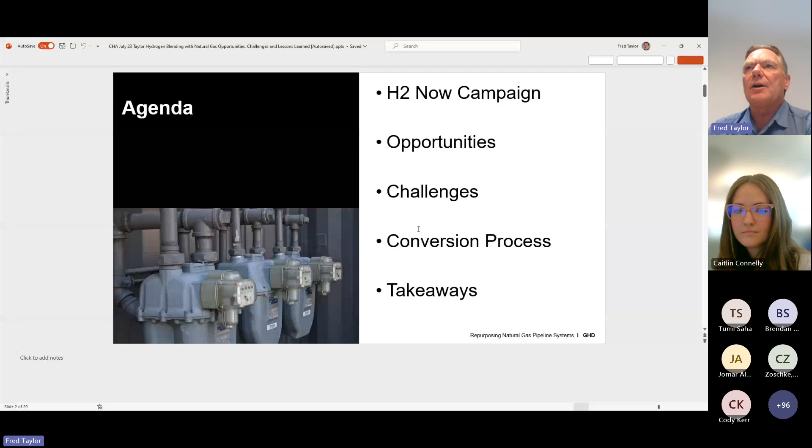So this is what I'm going to go through. Like I said, the campaign opportunities challenge, a little bit of the conversion process, and I'm going to leave you some takeaways around hydrogen blending. So the thought leadership piece we did called H2 Now was earlier this year. We focused on 3 areas: hydrogen market readiness, community and stakeholder readiness, and pipeline infrastructure readiness. And I'll go through each one briefly.

So hydrogen market readiness, we looked at all the different signals in the market that we're seeing. So there's many different things that are showing that the market is ready and it's growing and it's starting to adopt hydrogen blending globally across North America and Canada as well. So many things like technology advancements, adoption in different industries that are hard to abate, significant amounts of funding in different areas, and decarbonization incentives, research and development things. We're seeing decreasing hydrogen production costs, development of end user markets, and a lot of worker training programs.

So in summary, even though only 10% of the 600 large-scale hydrogen projects worldwide have reached final investment decision, a lot of projects are still going on, just a little bit slower and a little bit smaller scale, but there's a significant market getting ready to transform hydrogen blending across the globe.

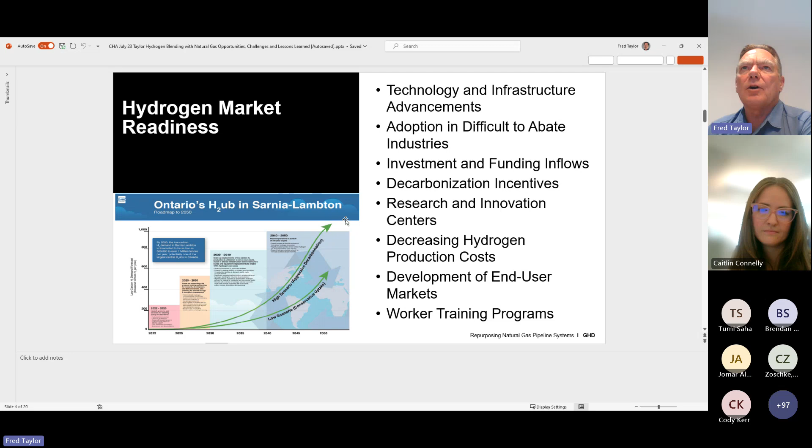There's a huge amount of information here, and we're keeping this up to date for multiple clients as we go, and it really helps us provide a good up-to-date view of what's happening in the market worldwide. And there's significant activities going on.

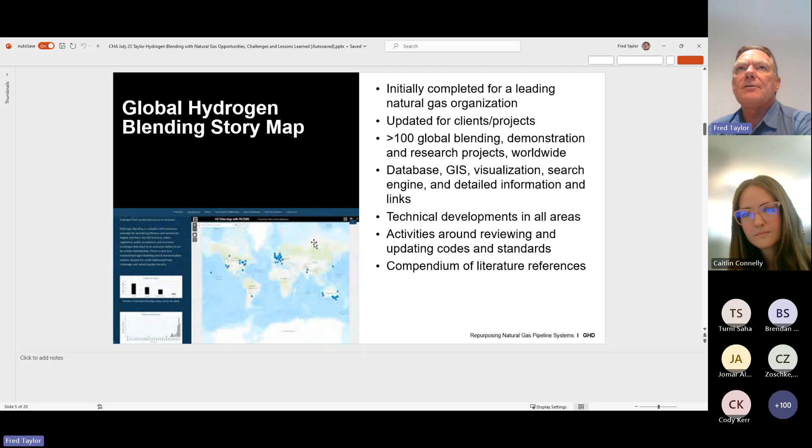Next up was community and stakeholder readiness. So the community stakeholders are so important when you're doing a hydrogen blending project. And the other category of stakeholders that is really important is the internal stakeholders. The utility, the energy company that's doing the project, is just as important to have on board as well. So when you first look at stakeholders, you need to map all the potential stakeholders that are going to be impacted or affected or want to be involved in your project.

You really need to engage them with good dialogue, introduction, and awareness around hydrogen, and then get a lot of feedback. So you're really managing those connections and helping bring them to your project to help you with your project. So a lot of people, internal, external, they say, why are you doing this? Who's going to pay for it? Is it going to be safe? Who else is doing it? The typical kinds of questions you get, and you need to be ready with a whole bunch of answers around that. And this engagement process is so important for hydrogen blending projects.

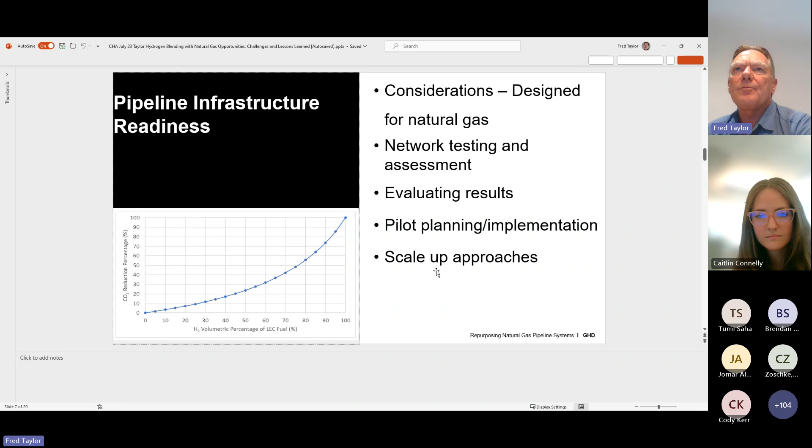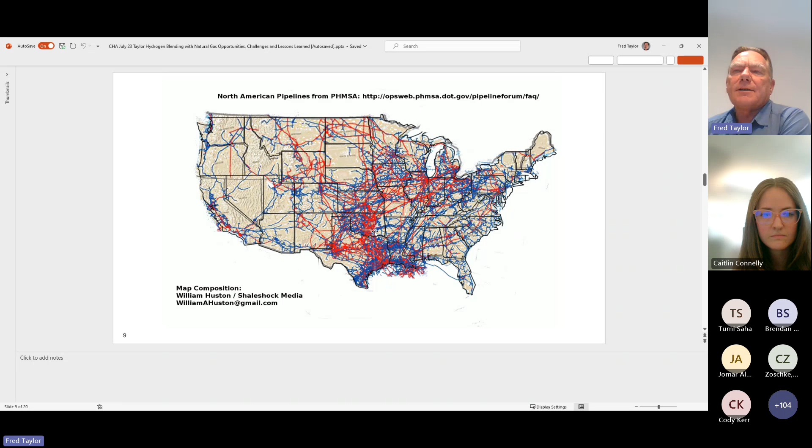So what are the opportunities around hydrogen blending? This is a map showing the natural gas networks, most of them in the United States, and Canada is very similar. And if you think about that network that we built over many decades, there's over 3 million miles of pipeline. 90% of it is lower pressure distribution, 10% higher pressure transmission. And it's so vast, one new customer is added to this network every minute in North America.

We've spent trillions of dollars on this infrastructure. We spend tens of billions of dollars on it every year, maintaining it and operating it. There's hundreds of gas utilities that manage this network. It's very highly regulated, and reliability and safety are absolutely critical for this network. And if you think about the numbers of natural gas in the US, it's about 32 trillion cubic feet per year. That's a huge amount of gas.

That's half of the volume of Lake Ontario, just a massive amount of gas. And it's used across everything, all sectors: business, industry, power plants, homes. So very widespread use. This is a very large infrastructure that we built.

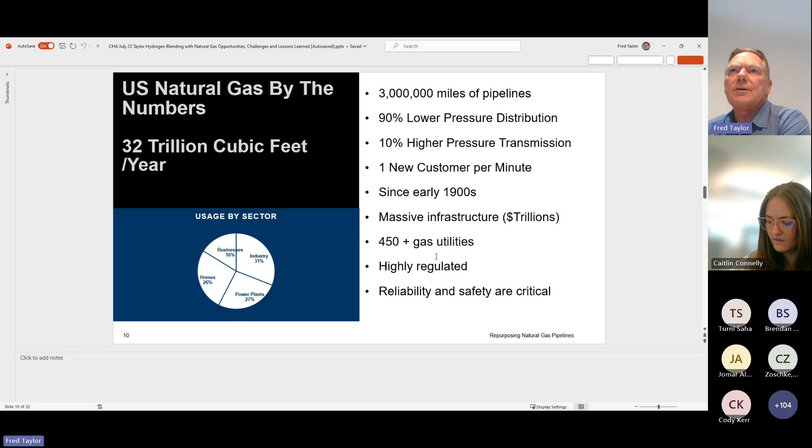So why are we looking at repurposing and blending? One of the fundamental reasons is if you use existing infrastructure, it's only 10 to 20% of the existing cost versus building a new pipeline, which is very difficult to do, as we're seeing out in society. It's much faster, there's a lot less environmental impact, and much more positive community engagement. And because you have all these thousands of users on the pipe network already, there's a lot of opportunities to help them decarbonize. And it really is a pathway to long-term transition.

There's many examples of pipelines that have been converted to blends or 100% hydrogen. One at Long Beach, a crude oil pipeline, actually, that's now 100% hydrogen through a residential area. Backbone pipelines in the Netherlands and Germany. And there's a lot of activity in Australia where we're doing much work around converting pipelines.

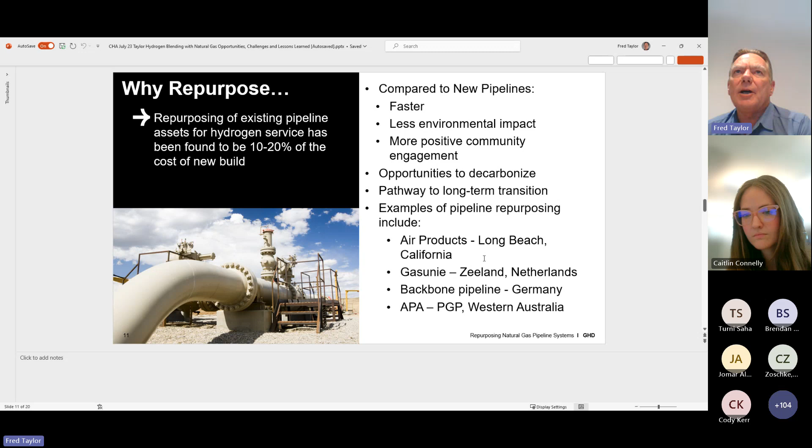So what are some of the challenges? Hydrogen is just different than natural gas. It's more flammable, it's more potentially explosive, it's got a different heating value. So that provides really significant challenges around blending it into natural gas and then using it at 100%. Integrity is always something people hear about when there's metal steel pipelines. The hydrogen molecule is so small, it gets right into the structure and it can cause embrittlement and cracking and that type of thing. So there's a real integrity issue that needs to be addressed.

Safety, obviously, because it's a different kind of gas. Metering gas quality is different with blends than it is with natural gas. And then compression is very different for hydrogen. You need a lot more energy to compress hydrogen than natural gas. And you need to manage the network, including things like large underground storage caverns that are part of lots of networks. And then end users, there's thousands of different end users. They all have different equipment, different appliances, different applications. You need to look at some of that equipment because a lot of it can accept a blend, some can't, and some the OEMs are working to make it so it can accept hydrogen.

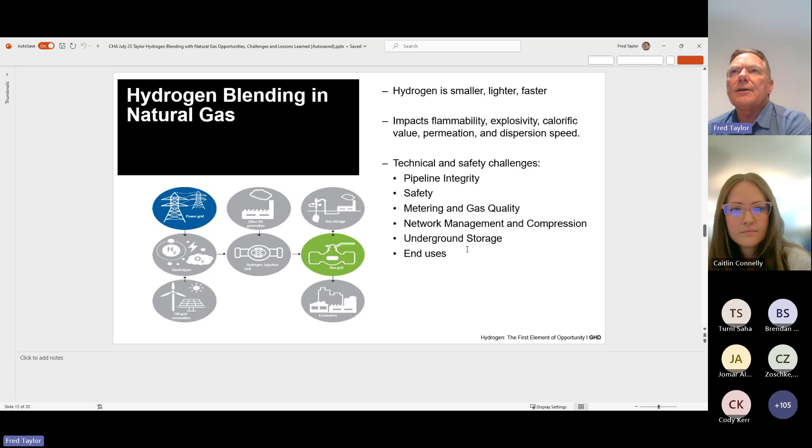So broadly speaking, gas transmission versus distribution. Gas transmission, these are the large interprovincial, interstate, intercountry diameter steel pipelines that provide a lot of gas long distances. They're a higher risk because of the higher pressures and the steel piping. So that diffusion and embrittlement issue becomes much more enhanced potentially with gas transmission lines, and it needs to be addressed.

And if you think of our networks that we built over many decades, the steel types have changed, the different ages of networks in different places, the workmanship has changed around welding and installation. There's a lot different when you introduce hydrogen: the velocity changes, the compression changes, all these different things need to be considered when you're looking at blending into a gas transmission line.

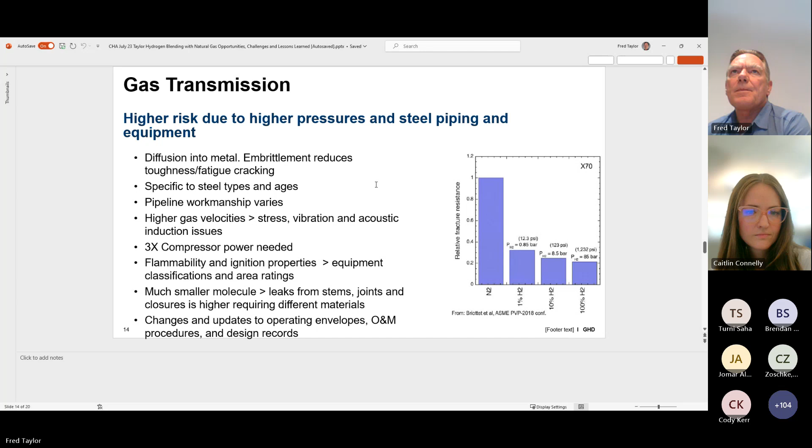On the other hand, gas distribution lines, a lot of them are plastic. They're newer, they're a lot less likely to be impacted by embrittlement with hydrogen, so there's a lower risk. And they also operate at lower pressures, which makes it a little bit easier. So similar kinds of issues need to be addressed, though, with all the equipment around the valves, the heaters, the meters, all the things that go with the network. Because if you blend hydrogen, the hydraulics change and the safety potentially changes as well. And you need different instrumentation to be able to monitor and measure the blends properly.

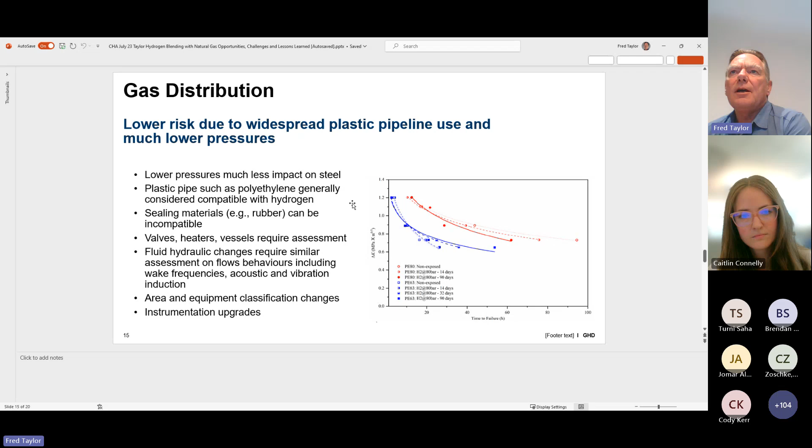So the conversion process, just very generally, there's a very structured process of engineering assessment that you really need to go through. The first step is to look in very good detail at the particular part of the network that you're looking at converting to a blend or 100% hydrogen. All the information on the materials, the construction, how it's operated, how it's inspected and maintained. You really need to evaluate that versus the large body of information that's been developed globally in terms of what you can and can't do with blending and pipeline systems.

Based on that, you have a good general sense of what you can do or not do in terms of blending. And then a lot of times what you'll do is some actual laboratory testing in the hydrogen environment to verify some of your desktop assessment work that you've done.

And then based on that, you'll look at all the other aspects of operating the pipeline and come up with a conversion plan, including where the hydrogen comes from, how much you're going to blend, how you're going to scale it up, how to deal with the end users and the community and the regulators, et cetera. And then you have an implementation plan. So in very broad brush, that's the process that you follow, and it's been followed on many projects globally, and it's being followed on projects in North America as well.

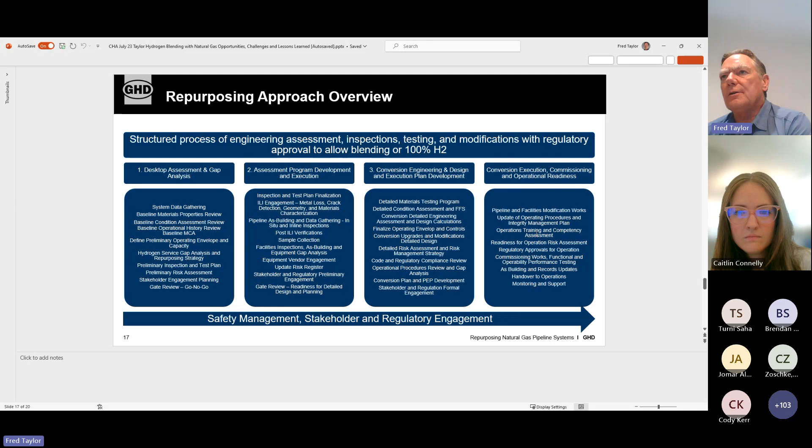This process takes up to 3 to 5 years to do, depending on the size and scale of project you're doing, how much of a network you're trying to convert, whether there's sensitive users or end users and that type of stuff, the regulatory environment, et cetera.

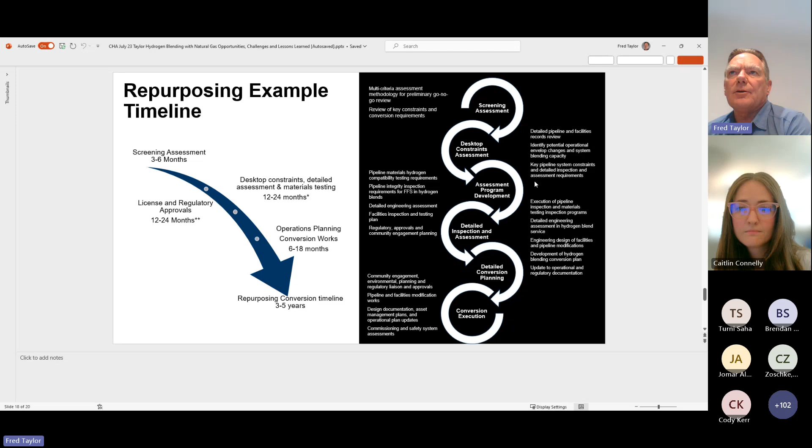And finally, just some takeaways. So really, I want to just say that this widespread existing natural gas network that we have is very amenable to hydrogen blending. And we should be using that network as part of our energy transition. It's already built. It's a lot easier to use infrastructure we have than to try and build new infrastructure and spend more money, have more environmental impacts and more concerns about building new infrastructure.

Because of all the uses of natural gas, the thousands that are in place already, there's very good opportunities to decarbonize, especially in hard to decarbonize industries that don't have other technologies readily available, like cement plants and steel plants and power plants. But that being said, there's absolutely technical challenges, like I talked about, economic challenges until the hydrogen economy gets to scale, regulatory challenges. It takes time to change codes and standards and regulations. You want to be safe and reliable when you change networks to hydrogen blending.

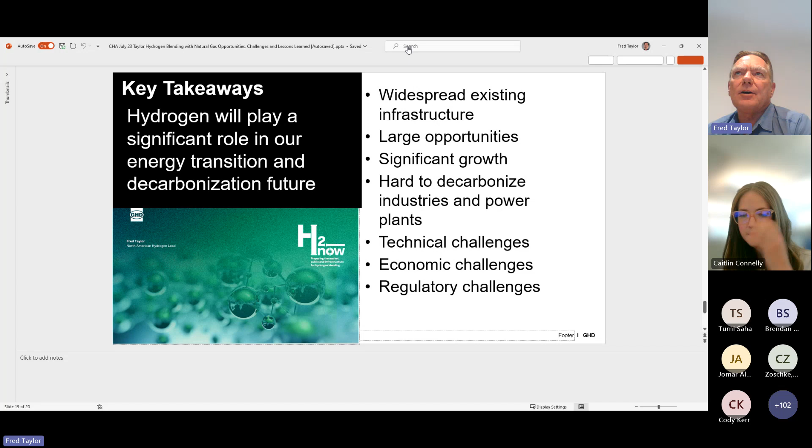And the process that you follow, you really want to deal with these challenges head on and be comfortable and conservative that you have a good plan for addressing all the issues and manage them going forward when you do a project. So with that, I'm going to hand it over to TC Energy and ATCO, two of our great clients, to talk about their project.

Thank you. Caitlin, feel free to share your screen. And everyone just hold on. Okay. So I hope my slide is showing. Yep. Perfect. Thank you.

So my name is Caitlin Connolly. I am a project engineer with TC Energy, and joining me for this presentation is Cole Zoschke. He's with ATCO and the hydrogen team over there. We are going to be presenting on our work with GHD that we've been doing, the feasibility for changing of service fluid from natural gas in an existing transmission pipeline to pure hydrogen or a hydrogen blend.

I want to take a moment and just showcase our companies we've been working with on the side here. So we've been working with GHD. They've been our engineering consultant for the project. We've also been working with Delphi. They've been helping out with the environmental benefits quantifications. CFER Technologies has been doing our material testing. And we do want to give a big shout out to Alberta Innovates. They've actually funded 50% of this project. So with that, I'm going to hand it over to Cole.

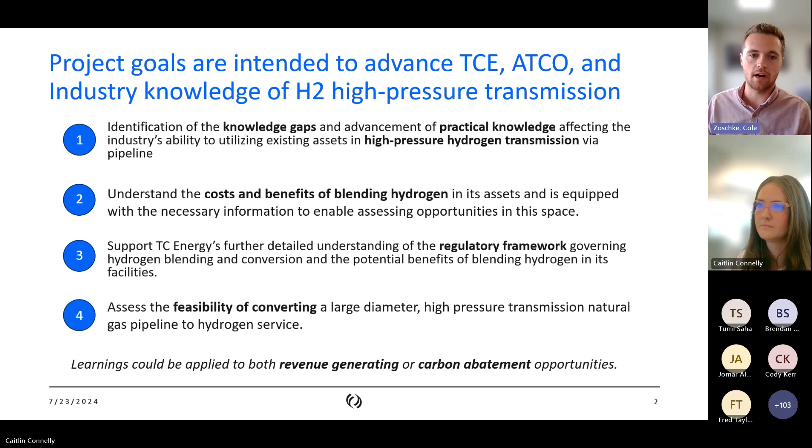And for the scope of work, an Alberta transmission pipeline was ultimately selected as the study location for assessing this hydrogen conversion. This pipeline consists of 131 kilometers of 20-inch line operating at a MOP of 9930 kPa. It was constructed recently, back in 2019, and it actually connects a producer to two natural gas fired power plants. The pipeline consists of 120 kilometers of main line, a meter station, 11 kilometers of lateral pipeline, 3 valve sites, and 2 riser sites.

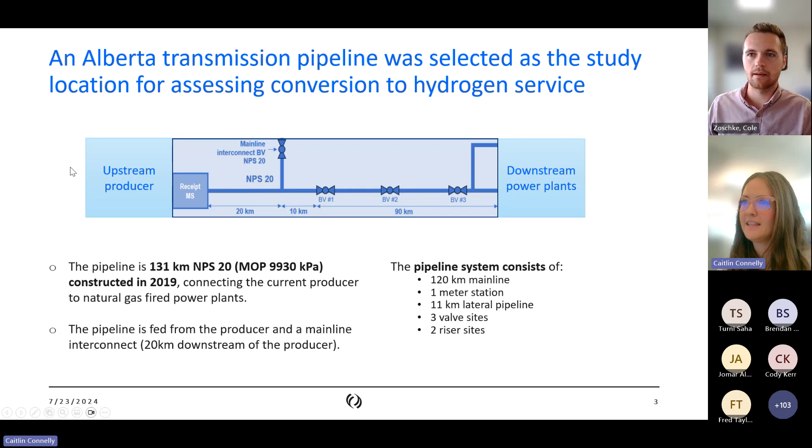Perfect. Thanks, Cole.

So for this project, we've been using CSA Z662 Clause 17 as our basis. Back in the 2023 revision, Clause 17 was introduced, and what it says is it requires an engineering assessment to confirm the max allowable hydrogen content and the maximum operating pressure of the system when we introduce hydrogen in there. So this is kind of what we've been basing the whole project off of. All the criteria for that engineering assessment can be found in Clause 17, and that's what we've been figuring out how to address through the project.

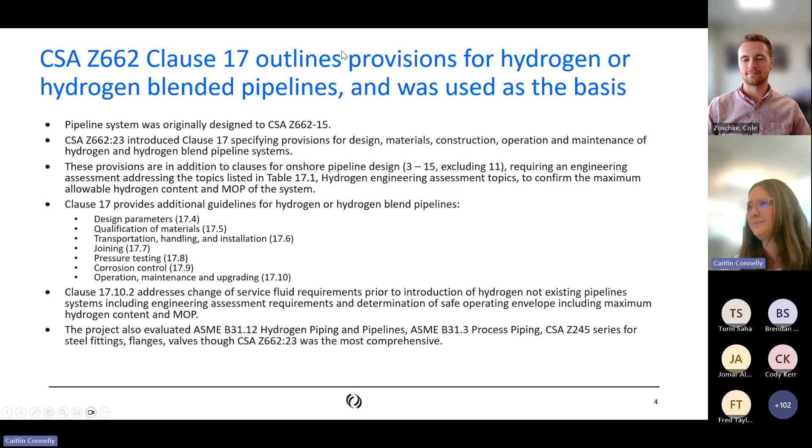Our methodology for the project was kind of just building off of what Fred was talking about earlier. We're stopping at the feasibility assessment though, and this is very much about asset readiness versus operational readiness. A lot of our operational procedures are being looked into through other initiatives. So for this project, we're doing phase 1 and phase 2 for the asset readiness.

Phase 1 was all about scoping and setting boundaries, understanding what we don't know. The last deliverable from phase 1 was a very comprehensive design basis memorandum. And that feeds into phase 2, which we're currently in on the project. Very much getting into the details, doing the material testing. We'll be doing a process hazard analysis workshop, and having the engineering assessment as the final deliverable of this phase.

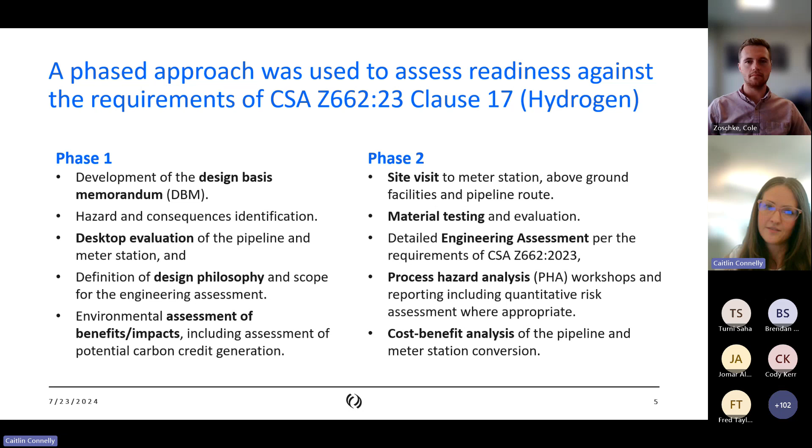From a screening assessment, we identified that this pipeline system is likely suitable for introducing hydrogen. MOP restrictions may be required. If you look at bullet point 4 here, the overall outcome was an amber assessment on a traffic light system. So it wasn't a clear go-ahead to just start introducing hydrogen, and it also wasn't any fatal flaws. This amber pretty much told us that we would have to do some further material testing and more desktop analysis before we can give a more definitive answer.

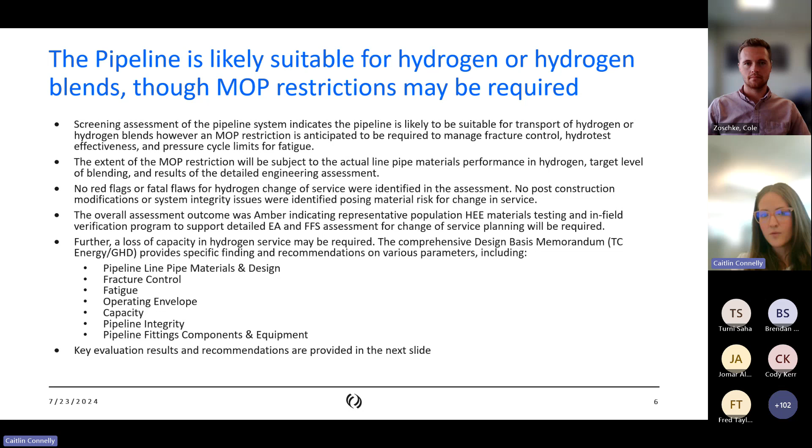And then if I just go to the next slide, the operating envelope and capacity were also assessed, because introducing hydrogen as a different fluid than natural gas had hydraulic implications. When we talk about operating envelope, it's really talking about the operating limits at a hydrogen volume that a pipeline can operate at while meeting acceptable safety and risk criteria. So it was parameters such as pressure, temperature, hydrogen volume and concentrations, velocities, etc.

So we did run it through the screening assessment, and we did a preliminary capacity assessment from there through our system design team. For equation of state, they used the Redlich-Kwong equation of state for this initial assessment. You'll see bullet point 3 there. It talks about an energy basis reduction of about 15% if we're putting through pure hydrogen, and that was verified through this assessment.

But for phase two, we'll be going into that a bit more. We'll be refining the MOP calculations, because we used quite conservative calculations for phase one, and those feed right into the capacity assessment, so that will be refined as well. Bullet point 4 talks about change in gas velocity, so that's something that will be looked at a bit more in phase two as well.

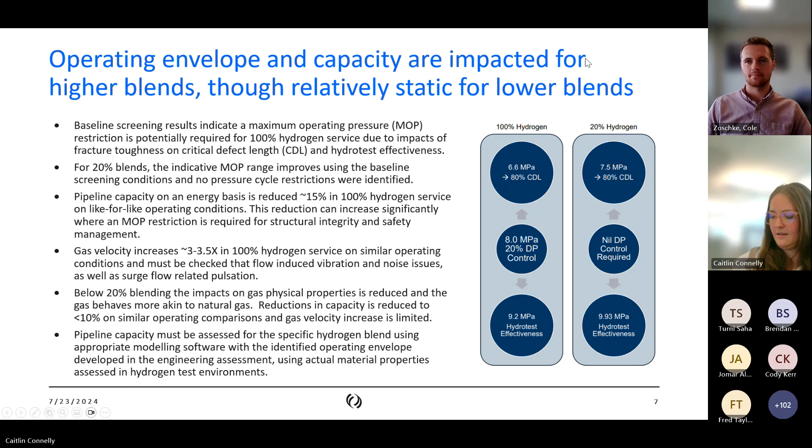And we did do some low percentage blending implications on the hydraulics, and it really wasn't that much. But the MOP definitely was reduced with 100% hydrogen, so we'll be looking at that one a bit more. And then on to Cole again.

A big part of this project was the material testing in the hydrogen environment to identify the long-term impacts that hydrogen exposure has on the pipe. So instead of focusing on the immediate hydrogen exposure, which is better understood in the industry, this project focused on long-term hydrogen exposure testing. Testing is being completed in 100% hydrogen environments as well as in air environments to compare how hydrogen actually impacts the pipe.

The key tests include tensile testing, fracture toughness, and fatigue testing. We're actually utilizing material left over from the pipe for this material testing, and for the project we're just using one specimen of wall thickness. Again, this is a feasibility assessment, and we obviously aren't going to be proceeding with injecting hydrogen very soon.

However, it's identified that in trying to move forward, we'll have to do further testing on the different wall thicknesses of the pipe. And this is what CFER is taking care of for us.

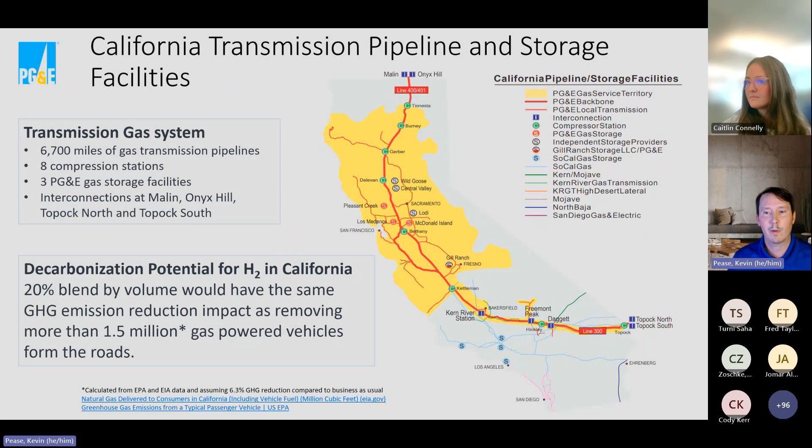It'll consist of a 1 to 2 mile transmission test loop with new and vintage assets representative of those found in the natural gas transmission system. Hydrogen blend levels are planned at 5%, followed by stepwise increase to 10, 15, and 20%, and potentially beyond that in the future. Operating pressure will be 720 psi, or about 5 megapascal for those metrically minded folks. This aligns with the ANSI 300 standard, and we intend to operate the facility for at least 10 years.

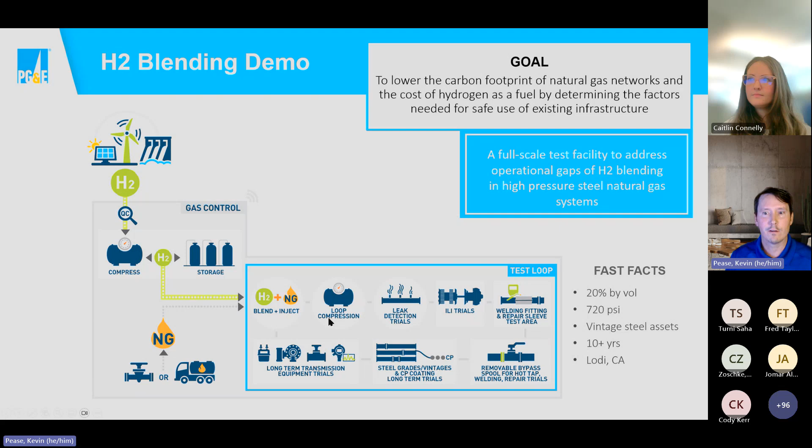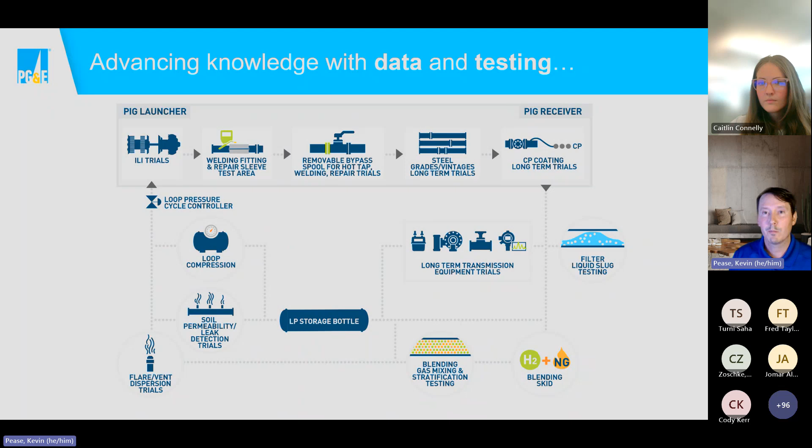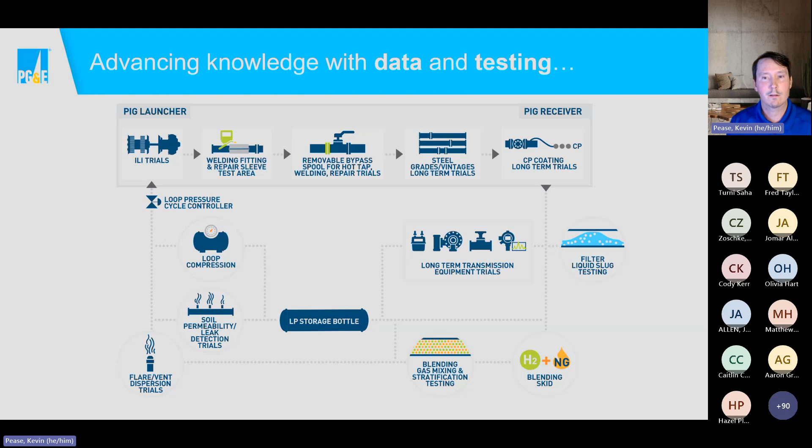The preliminary test loop design will have multiple areas for long-term testing of pipeline materials, transmission equipment, and hydraulic performance testing. I apologize. Eight proposed test areas are shown on the slide, which include inline inspection tool trials, welded high-strength fittings, repair sleeves, live welding and repair testing area, pipe and pipe coating testing, transmission equipment long-term trials, compression testing, blending and odorant injection trials, as well as a leak detection testing area.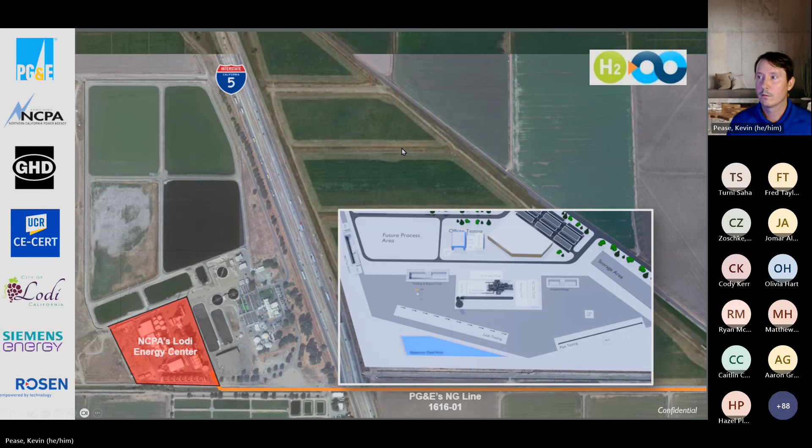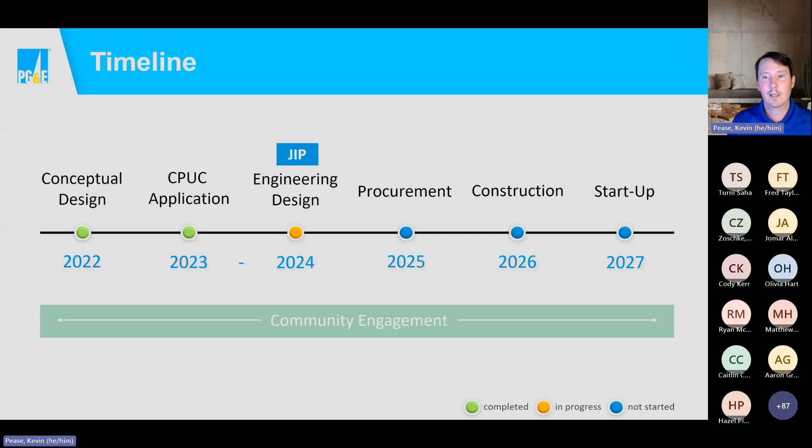In parallel, we're working to launch our joint industry project to run over a 1 to 2 year period that would move the engineering design of the project forward. Following completion of the engineering design, we'll move to procurement, construction, and startup hopefully by 2027.

Now I'm going to take a few minutes to talk about the joint industry project for this project. We're inviting interested parties, whether you're a gas utility, technology provider, or OEM, to join us in the joint industry project. The intent is for the facility to be representative of most legacy steel infrastructure in North America and function as a test bed for the industry. Electric Power Research Institute, also known as EPRI, will administer the JIP and provide strategic technical support for the design of the test loop and test plan vision.

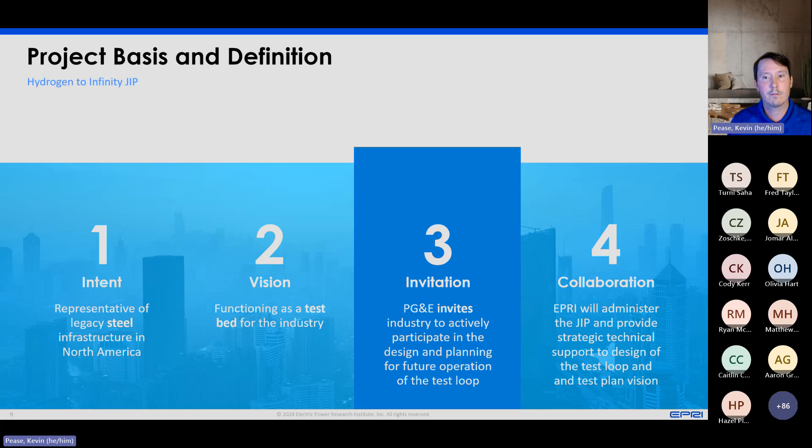The joint industry project will include the FEED and detailed engineering studies for Hydrogen to Infinity's transmission test loop. These pre-operational stages of the demonstration are critical to ensure the comprehensive design of the facility is completed, and we don't want to miss anything before it becomes operational. Once the facility goes live, this will evolve into a new JIP to oversee long-term full-scale testing.

The three main objectives are understanding the long-term effects of blending hydrogen with natural gas in a test facility that represents much of the existing natural gas transmission pipeline infrastructure of the JIP funders. Second is to identify the conditions or mitigation measures, if any, that would ensure a 20% hydrogen blend will not pose added risk to the common carrier pipeline system. And third is to increase understanding of the operational limits of existing natural gas transmission pipeline infrastructure when injecting hydrogen blends at 20% or possibly beyond.

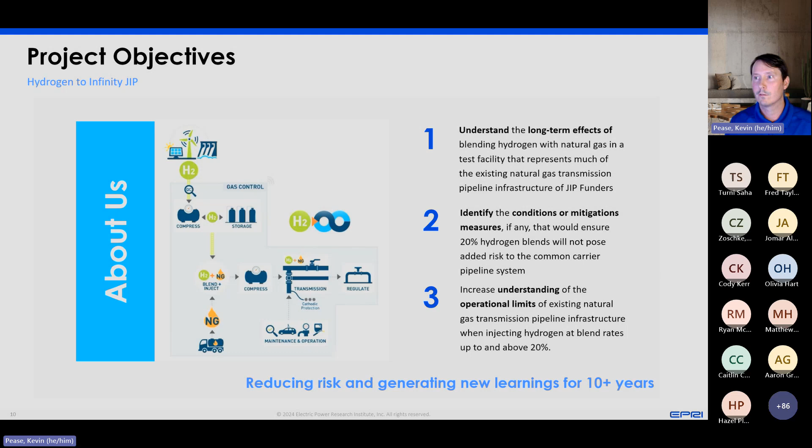So on the left side of this slide, it would be great to have your participation in the JIP. Your natural gas infrastructure would be representative in the demonstration's full-scale testing through the engineering design contribution of your pipe and pipeline components. These need to be set aside before the demonstration goes live, accounted for in the engineering design of the test loop, and installed during the construction phase. Your guidance ensures all the right full-scale tests are designed for. We don't want to find out we've missed a critical test after it's been operational.

If you're interested in building a similar facility in your area, you'll have access to the blueprints to do so. And so you'll have name recognition as a leader in this big final step to really move hydrogen blending forward in North America.

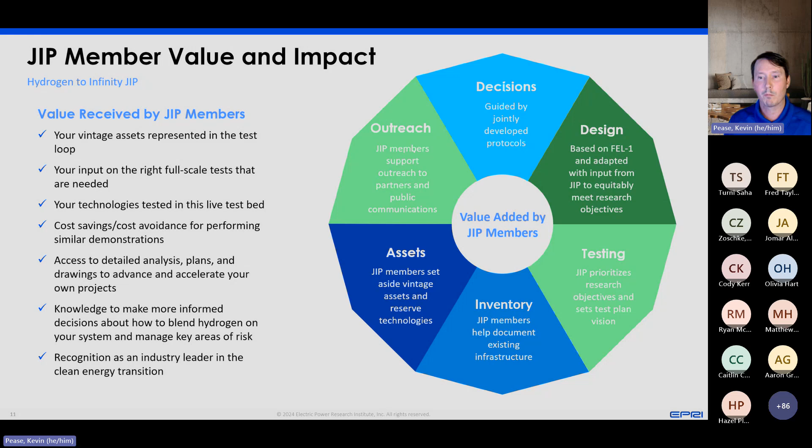On the right side of the slide are the responsibilities of members for the Joint Industry Project. These include active engagement through feedback on the test loop plans and design, and research objectives. We're using the design from the FEL1 study, as well as hydrogen blending requirements from the California Public Utilities Commission decision ordering this blending demonstration. Documenting and setting aside your vintage assets and technologies for inclusion in the test loop. And finally, a financial contribution to support the engineering design. We're looking for $160,000 per member over a 1 to 2 year period.

And finally, here are anticipated tasks and deliverables for the project: identification of key decision points in the test loop design, a test plan vision that will accompany comprehensive engineering design of the test loop, inventory of vintage assets for inclusion in the test loop, and solicitation for phase 2 of the JIP, pending external funding for procurement and construction of the project.

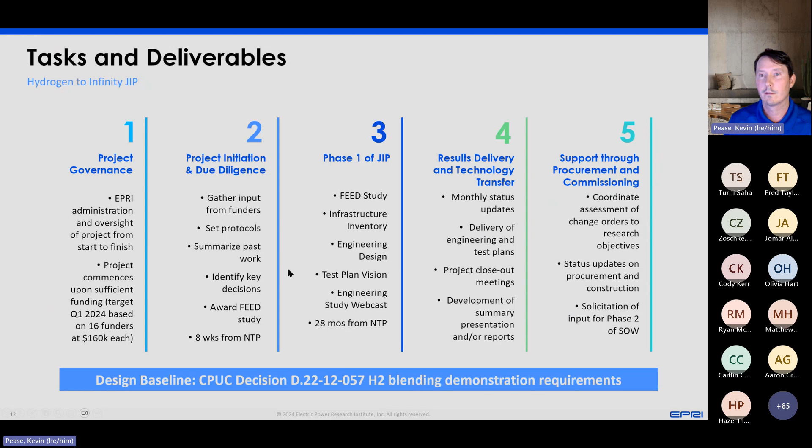And a little bit more about EPRI, the third-party administrator. If you're not familiar with them, they lead the Low Carbon Resource Initiative along with GTI Energy. It looks at fundamental advances in a variety of low carbon electric generation technologies and low carbon chemical energy carriers, such as clean hydrogen, bioenergy, and renewable natural gas. EPRI will provide strategic technical support for the design of the test loop and test plan vision.

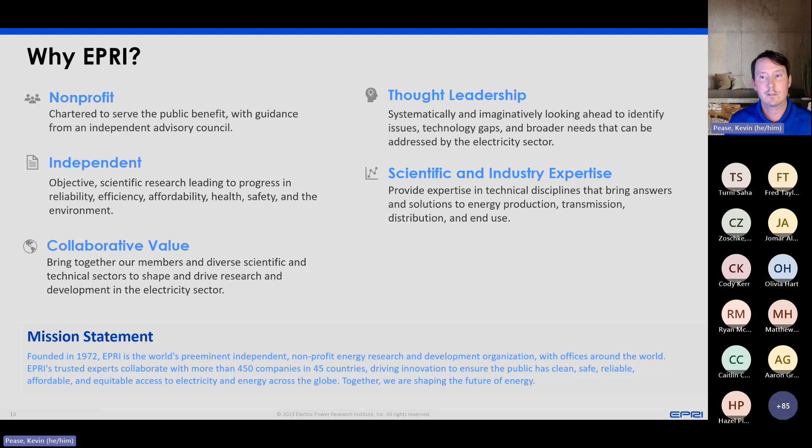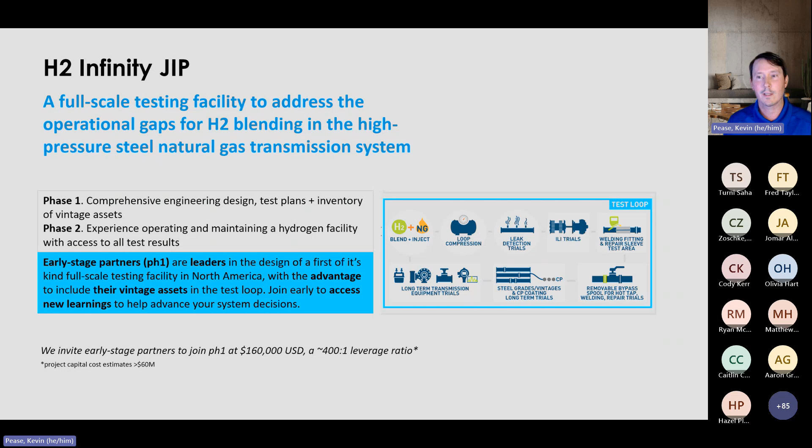And finally, last slide, it's a summary of the JIP and the full value of phases 1 and 2, and the importance of being an early stage partner with us in phase 1. Early stage partners are leaders in the design of a first of its kind full-scale testing facility in North America. The advantage of being able to include your vintage assets in the test loop. You'll also have access to new learnings now to use in your strategic hydrogen blending decisions on your system. And lastly, the financial contribution of $160,000 is very low when compared to the total capital cost to stand up the facility. It's around a 400-to-1 leverage ratio.

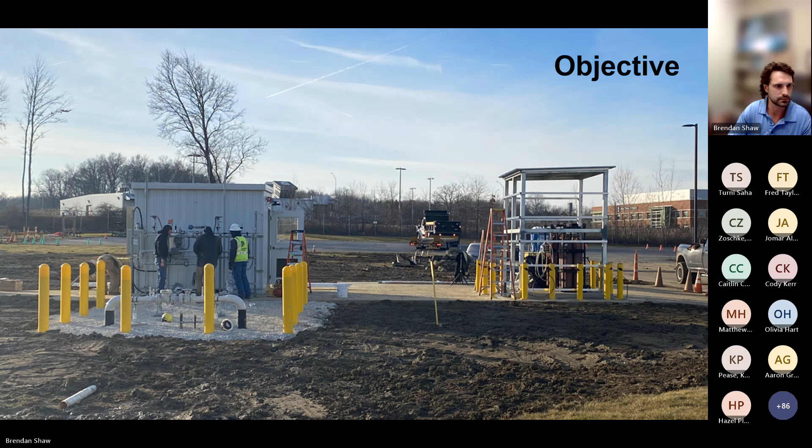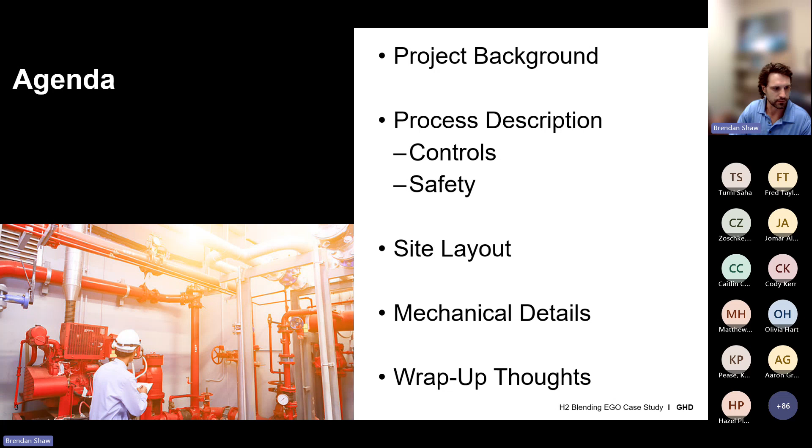So quick agenda here. Got a background, process overview, controls and safety, some photos about the site layout, and then mechanical details, and then some final thoughts. So this facility is an Enbridge training facility located in Boston Heights. It's called Hydrogen Heights. It's a town between Cleveland and Akron in Ohio, in the U.S.

So, as I said, Enbridge Gas of Ohio is the owner and operator, and they led the construction on the project also. GHD led the engineering and design of the project and provided a multidisciplinary staff ranging from process mechanical folks all the way to civil structural for building details and permitting, and then electrical and automation folks as well. We worked with Praxair at the time, now Linde, as they were the gaseous hydrogen cylinder provider, as well as a few other pieces of equipment.

But the purpose of the project is really, as we've been talking about here today, for Enbridge, or Dominion at the time, to get familiar with hydrogen blending for natural gas between 1% and 20% hydrogen. Really just understanding the impacts of doing so on leaking and appliances, so they can understand what happens in the longer term when you do this, with a real hands-on approach.

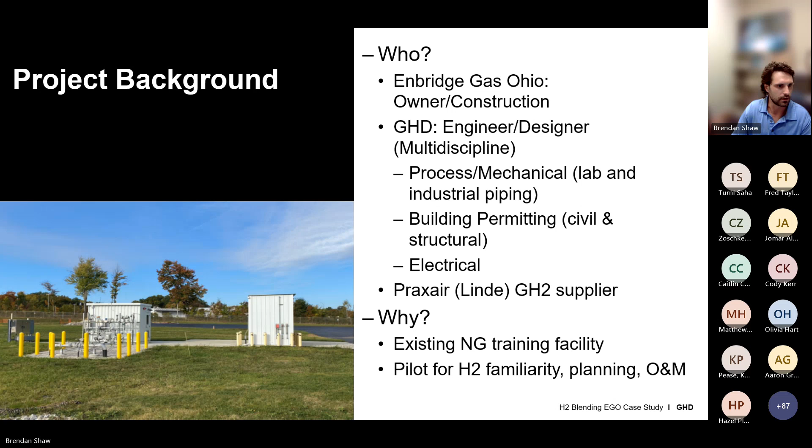The facility itself is a large facility with several training classrooms and features. It does have 16 homes, which you'll see in a bit, and street lanterns across the site, and those are the fuel users. So how we conducted this project is a typical engineering phase approach. Started with a concept, asking questions like, are we using cylinders versus an electrolyzer and solar panels for the hydrogen supply, and really just nailing down the process first.

And then, along with the client, we moved to the FEED stage, or 30% front-end engineering design, to produce some preliminary drawing packages and deliverables. Once that's all agreed and set, we go into the detailed design, where we bring all the disciplines in, tie everything together and produce the issued for construction packages, P&IDs down to pipe layouts and foundation drawings. Finally, the last stage for GHD was construction support. One noteworthy thing we did here was creating a control narrative that really assisted the Dominion programming implementers with that part of it.

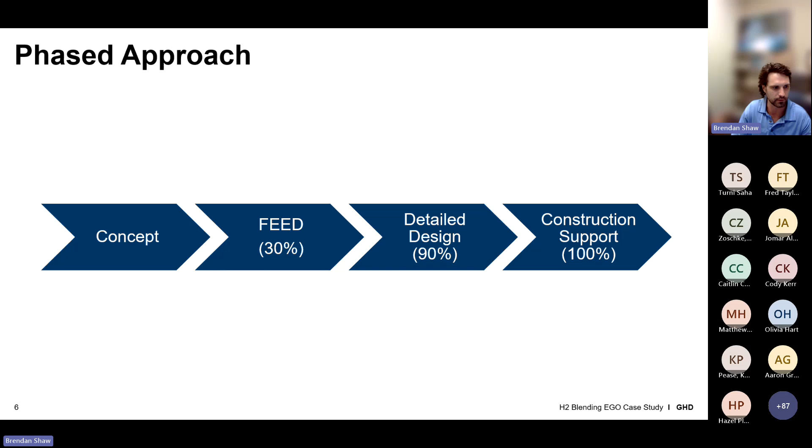So the process itself, at a high level, is pretty simple. We're just taking the existing natural gas pipeline fuel to the training facility and adding some hydrogen into it at a controlled rate. There is a provision on the site for future on-site hydrogen production, but for this phase, they just have some cylinders on site.

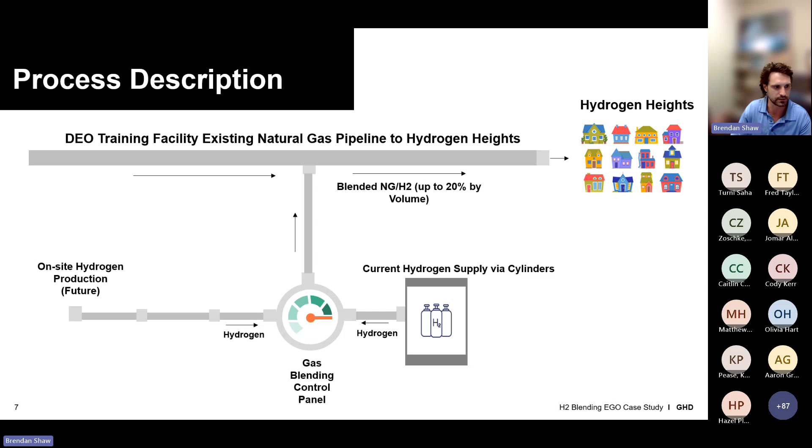And the PLC would say, okay, 500 SCFH of fuel. I have a 20% hydrogen target set point. That means I need a hydrogen flow of about 125 SCFH, and I'm just going to control that flow rate of hydrogen with the control valve and the flow meter there to just hit that rate. And as the test varies, the hydrogen will vary.

A few other things: we do have several safety devices, 4 different e-stops throughout the facility, 2 LEL meters, one at the building and one at the cylinders, several isolation valves to block flow upon alarm, and mechanical safeties like relief valves and regulators.

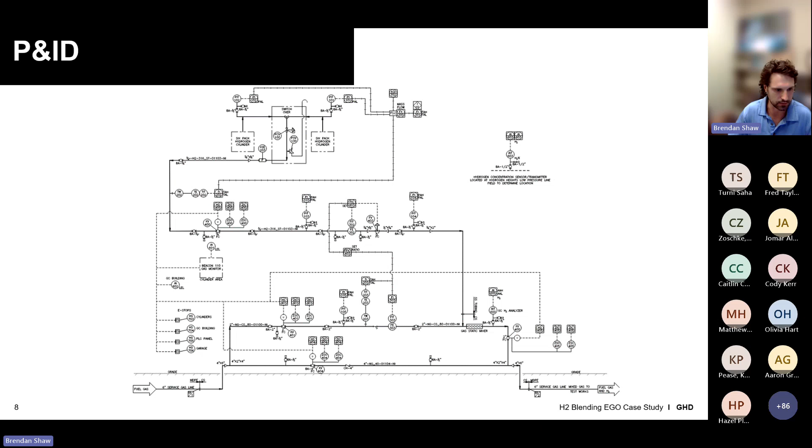And then we do have 2 different gas analyzer points, one gas chromatograph after the static mixer at the blending facility, which you'll see in a minute, and one analyzer which is a kind of newer technology provided by H2 Scan, downstream after it goes back underground out to the training facility. The next slide helps illustrate that.

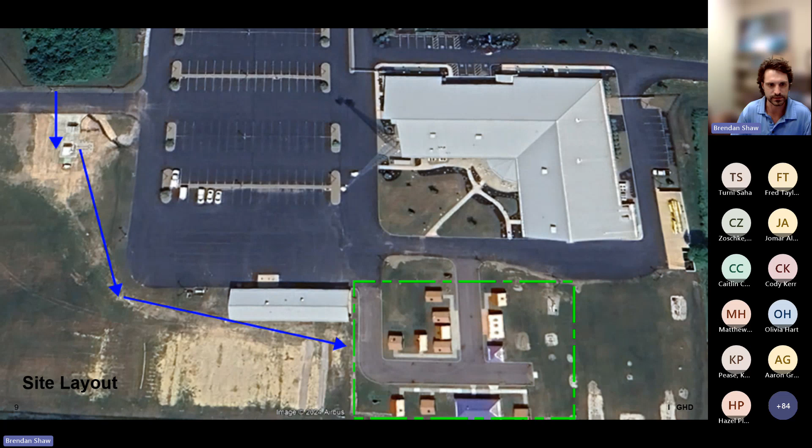So this is the overview. I don't know if you guys can see my mouse. I don't think so. The white building up in the top left after the first arrow is where the blending facility is, and the gas chromatograph building. Then it comes up above ground, then goes back underground all the way to the training facility there in the green box where all the houses are, and that's where the second gas analyzer is located.

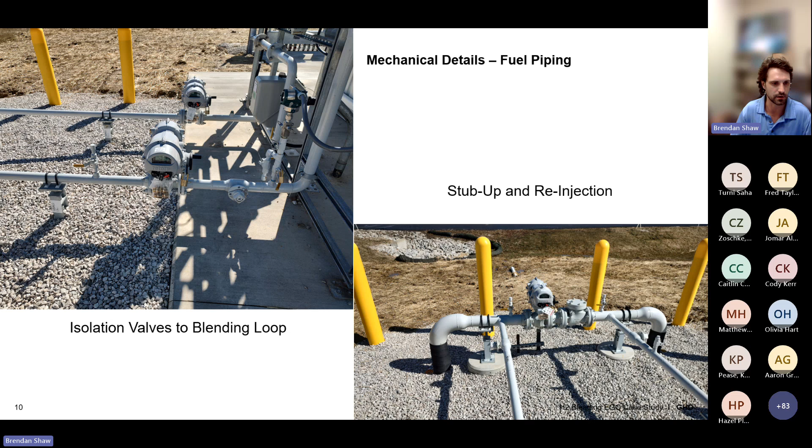Here's a couple of photos of that stub up, the existing pipeline coming up and then going back down. It's plastic underground and then carbon steel above ground. We've got the 2-inch little branches off from the bypass valve there to the blending loop.

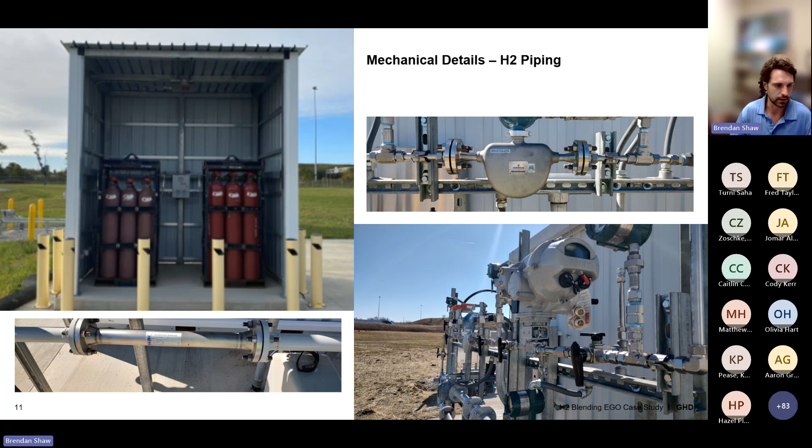Here's a couple photos of the hydrogen piping itself. You've got the cylinders there on the upper left, and the static mixer on the bottom left. There's a hydrogen flow meter there. It's actually the smallest one that Emerson had for this application, about a 1/2-inch Coriolis. And then we've got a bunch of stainless steel tubing, primarily for the hydrogen piping itself. And really that's the overview.

Just some things to consider: first, if you might want to implement something like this, what kind of control philosophy do you want to use? For us, we like this flow ratio concept with analyzer verification; we find it pretty straightforward. The second is, we had pretty small flows on this project, so it led us into using lab scale, GC type piping, but Dominion did have a desire to maintain industrial pipeline standards. So there's a bit of an inconsistency there.

So the point is, if you didn't care about maintaining that pipeline standard quite as much on your site, you could probably reduce the costs of the hydrogen piping at least by not trying to match everything. And the final one is, of course, the level of automation that you want to have on the project really impacts the cost and the duration of the project.

We had a lot of duplicative instrumentation and redundancy for several operating checks. And gas chromatograph facilities and equipment are very expensive. You don't necessarily need that. We've had designs with other clients that didn't care about this as much, and it definitely reduces costs. The final thing I'll throw in is that this is still generally new technology in this industry and for companies, and it naturally lends itself to more revisions and iterations throughout the design process. So that's pretty much all I've got.